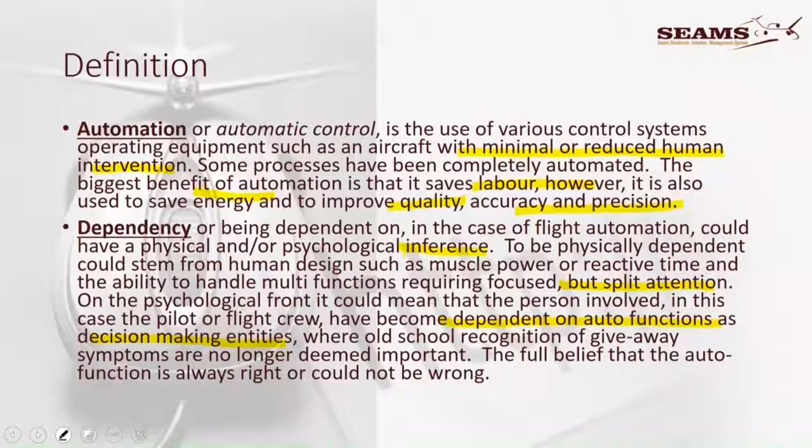That's a problem, because we get into our aircraft, we start flying, and it's an everyday occurrence where we use some form of automation. Whether that's your normal GPS doing some routing for you, or most aircraft now, when they fit them out with the latest Garmin 1000s, everybody makes sure they understand how to operate the electronics, and the electronics will actually take over all the functionality from the pilot. When it comes to single operators or smaller aircraft, it's basically the same thing. The capabilities once exclusive to the airline industry are now at the fingertips of your normal private pilot.

Just a little bit here to show the different kinds. Not a big deal. Advantages?

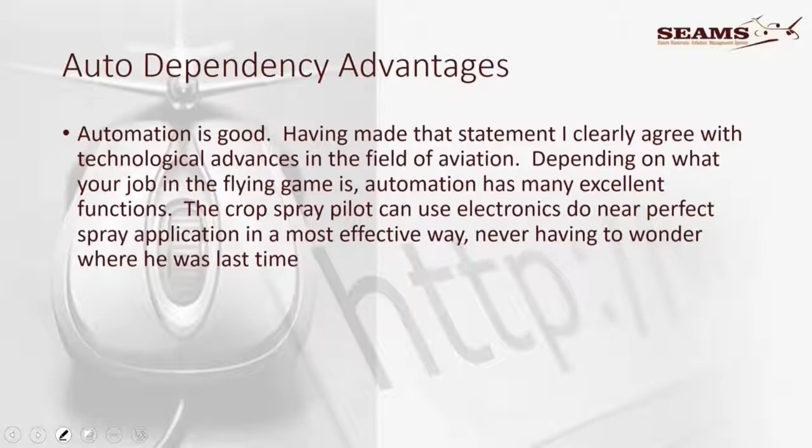There's a lot of advantages, and I agree. It would be a long list to say you can do this, and you can do this, and the rest. There are so many advantages it would be difficult to list them all. But it's great, sat in the cockpit the other day, and the aircraft can absolutely do everything. You just call up the flight plans, call up the approach plates, call up everything. The aircraft will put you on the ILS on final approach.

Or let's bring it down more to earth for the smaller aircraft guys, as used in the flight training schools. We've got autopilots as well, but besides the autopilot, we've all got GPS. Whether the GPS is on your phone, part of the aircraft equipment, or slapped on, whatever the case might be, it's a form of automation, and we are using the automation. And that is the trouble. Are we actually capable of using the automation correctly? Do we understand how to check up on the automation?

So fundamentally, it's great, and then we need, obviously, to operate from there. Just to say, the use of automated systems in itself is not a problem. That is not the problem. I absolutely believe that.

But if you are totally dependent on it... and I've seen how many accidents happen where guys start to fly in bad weather, instrument flight conditions, night flying and stuff like that, where once the autopilot disengages, the pilot is simply in trouble. We've picked up many an aircraft on the ground because the pilot wasn't capable of actually flying instruments himself.

Go and think about that. Now, you might say, but I fly for the airline. All right, it's fantastic, and I'm very glad that you've got an autopilot system when you're in the airline. I'm going to be even more glad if I know that if that auto system somehow fails you, that you're not going to fail me as a passenger.

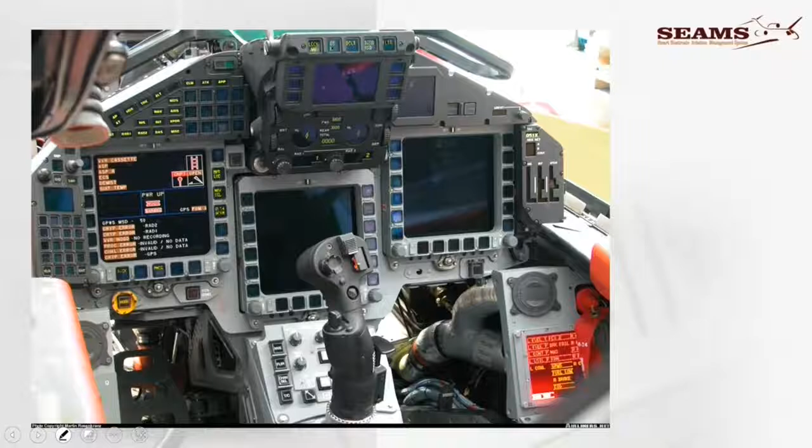Just another pretty picture of a pretty cool aircraft and what the environment looked like. Auto dependency pitfalls - the first one, habit forming.

Now, I'm not saying it's a bad habit, if it keeps within the rules of engagement. And the very first question is: do you know, have you been taught what the rules of engagement are when you use auto systems? If you don't know, we'll go into that later on.

How do you use autopilots? How do you use this? For now, just remember there is a protocol. There are checks that need to be done to come into the habit of the machine making the decisions, the machine making the decisions.

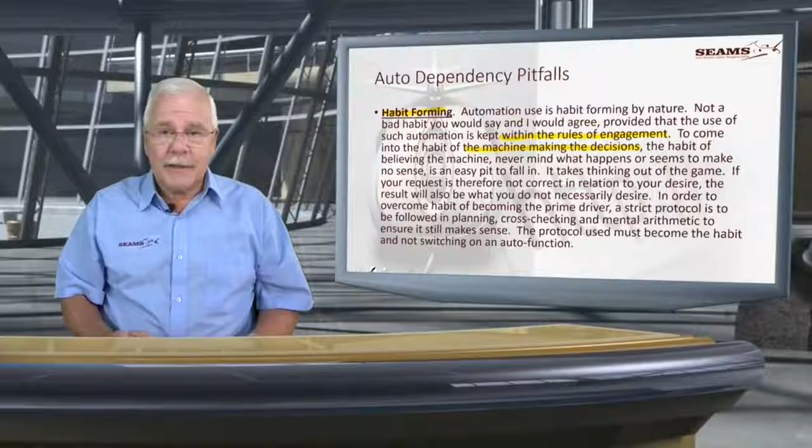Can you see the problem that I have here? The cognitive capability of the pilots, because it's just push and go, now becomes really a problem. The habit of believing the machine, never mind what happens, seems to make no sense. If it makes no sense, no, don't worry, the aircraft is right. It takes thinking out of the game.

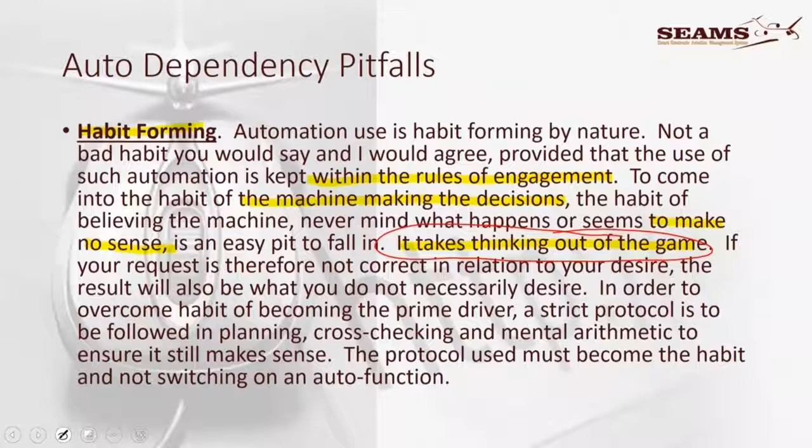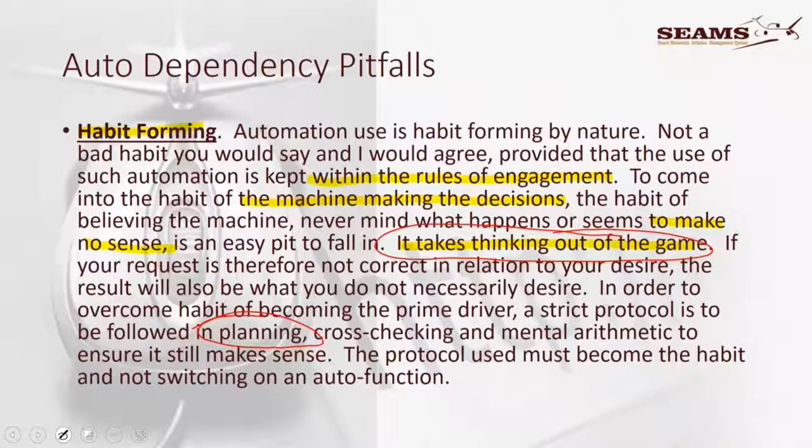Let me put this in red: it takes thinking out of the game. If your request is not correct in relation to your desire, the result will not necessarily be what you desire. In order to overcome the habit of becoming the prime driver, a strict protocol is to be followed in planning, cross-checking, mental arithmetic.

This is the thinking game, the game that we don't necessarily want to be in. It's so easy: go to button, go direct to, follow this approach.

We do the approach briefing. Are we really concentrating on the briefing? Have we got the capability? Are we able to take over from the autopilot at any time? It's just questions that I'm asking.

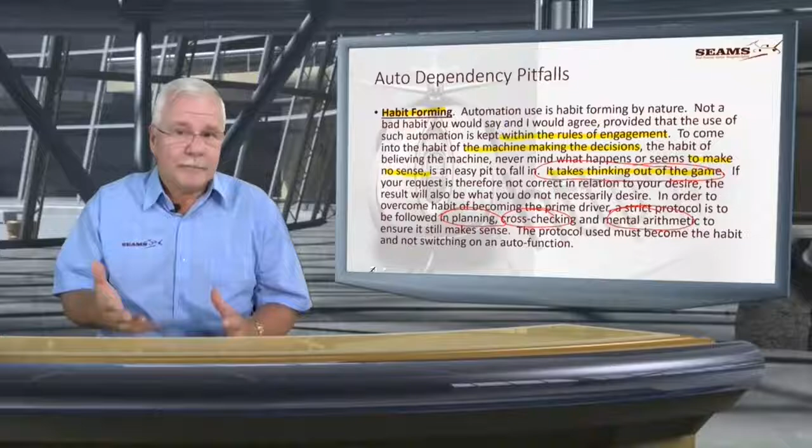Dependency forming. Now, what does that mean? When you become totally dependent on an auto function to do the job that we're earlier able to do, such as thinking, and here we're now going with the big ones: thinking, planning, decision making, basic flying, then you've lost the skill.

If dependency forming has taken away your motor skills and your cognitive capabilities, the basic skills, then we will read about the accidents in the newspapers. And unfortunately, it's the big boys falling out of the sky. We have learned to become computer operators and system manipulators, but we have lost the capability of actually flying and thinking like a pilot.

Again, not against the stuff, I'm absolutely for it. But I'm only for it if you can take over the function if the functionality is lost.

Raw data flying, can you still do it? No longer used to work out an approach. I don't have to work out let-downs. I don't have to look at sector safety altitudes and stuff like that. Oh, it's great, the computer is not going to make a mistake.

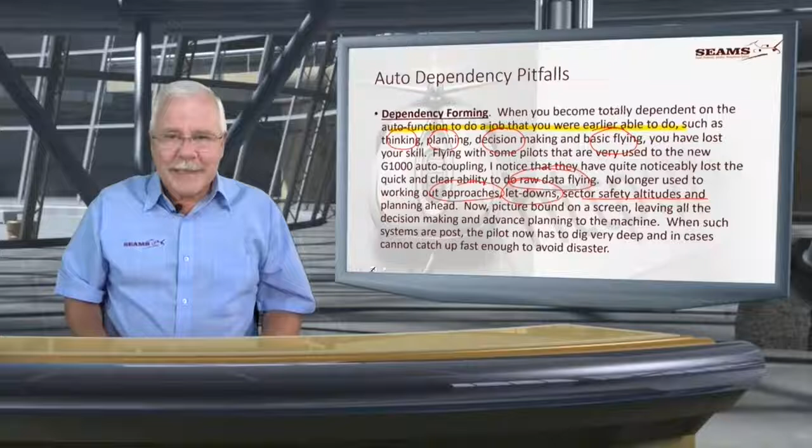That's the mistake — you're going to make the mistake. You're going to go to the wrong place. Maybe you should go to Golf Alpha Victor, but you've got in Golf Bravo Victor. It's quite a distance from each other. But if you don't pay attention, and don't have an idea where you're going, you're inside the trap.

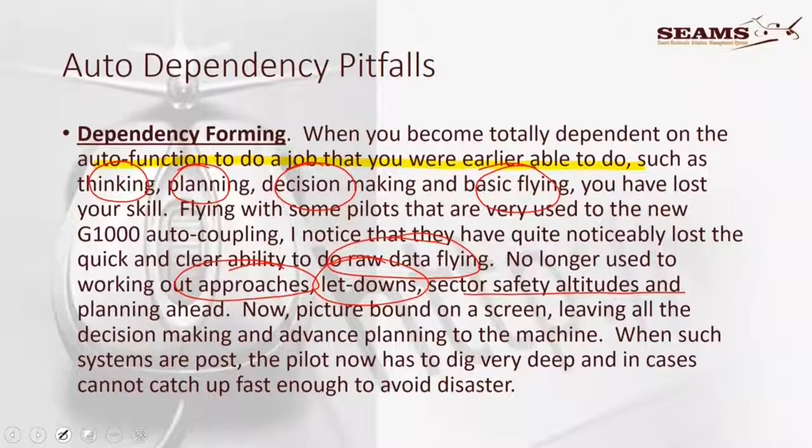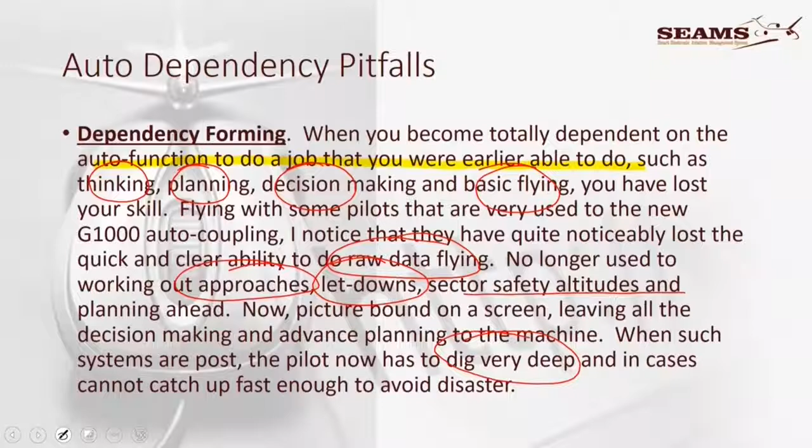And you are trapped. So it does not mean that we must stop thinking. When our systems fail, the pilot has now to dig very deep, and in cases cannot catch up fast enough to avoid disaster.

What about the skills? To have skills and to have the license to perform a certain skill has become, in certain circumstances, deemed as unnecessary. And we hear it all the time: 'Man, we're not going to have to train the co-pilots that long.'

We're going to do this. We're going to get them into the system. We're going to do that. And then, because we've got automated systems, we reckon that now we can save a lot of money by getting the drivers up in the front.

All right, and I'll put that one on and see how long it's going to last for you. That will be forever great, unless something goes wrong.

And you know what, I don't have to say that — you know that stuff has gone horribly wrong. And then the crew just simply didn't know how to even recognize that they were in trouble, let alone how to recover from a troubled state.

It's until the system fails or it has a glitch.

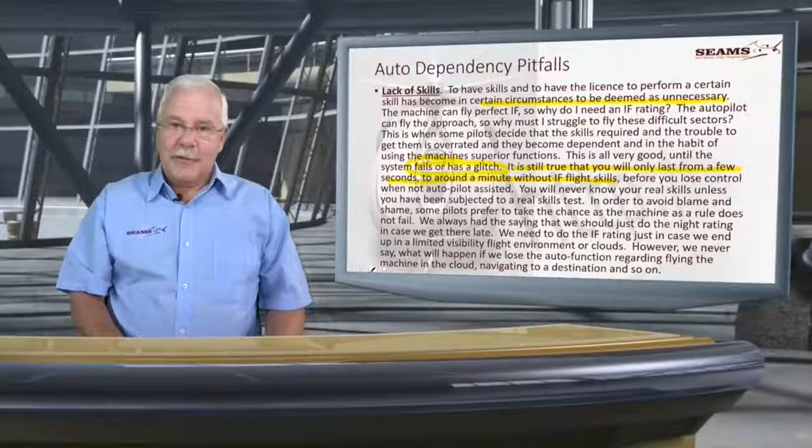It is still true that you will only last from a few seconds to around a minute without IF skills before you lose control when not autopilot assisted. Wow, I cannot stop. Everybody is playing their computer games and they have not been taught how to do a proper T-scan. The T-scan in today's world is as valid as it was yesterday.

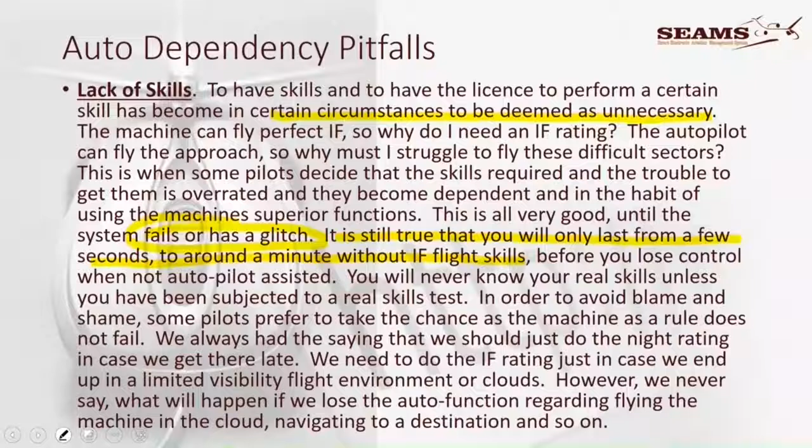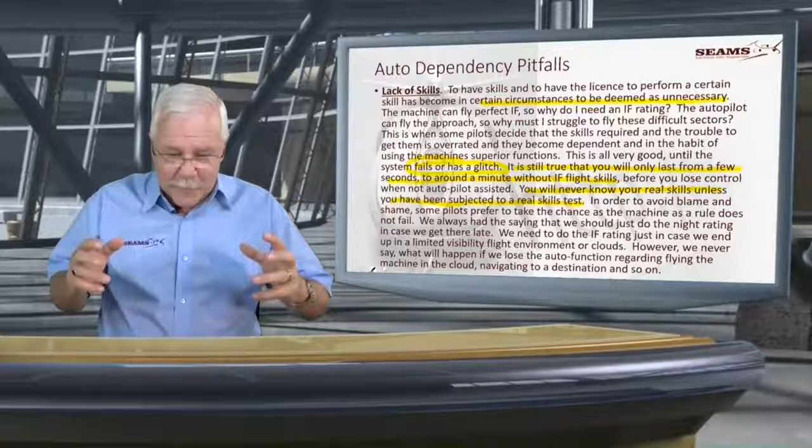Okay, now say you will never know your real skills unless you have been subjected to the real skills test. So what do we do in the simulator? We take away the auto functions from the pilot. There's two parts to the auto functionality test. The one is, if you use the autopilot, do you use the correct protocols? Do you have the correct calls? Do you do the correct cross-checks? And then the failures of the system starts. How do you pick it up and can you compensate? So this is what we do in a test.

Why? Well, if you cannot handle it in a simulator, where a crash is not a big indaba, although we feel pretty bad if we do crash, but in the real world, it's a total different story, obviously.

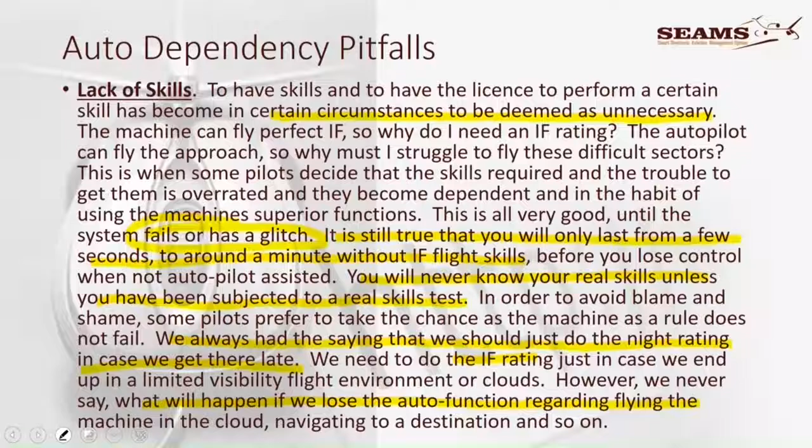We always had the saying that we should just do the night rating in case we get there late. Okay? We just do this. However, we never say what will happen if we lose auto functioning regarding flying, machines in the cloud, navigation, destinations, and so on. What am I saying here?

We do night flying just in case. I've heard the pilot say to me, I'm going to do an IF rating just in case. Are you going to do an autopilot failure or auto functionality failure or navigation failure? It's all auto functions. Have you got a plan? Is it something that you've been taught? Have you got the knowledge? Have you skills? Or have you got an attitude that, nah, too much trouble?

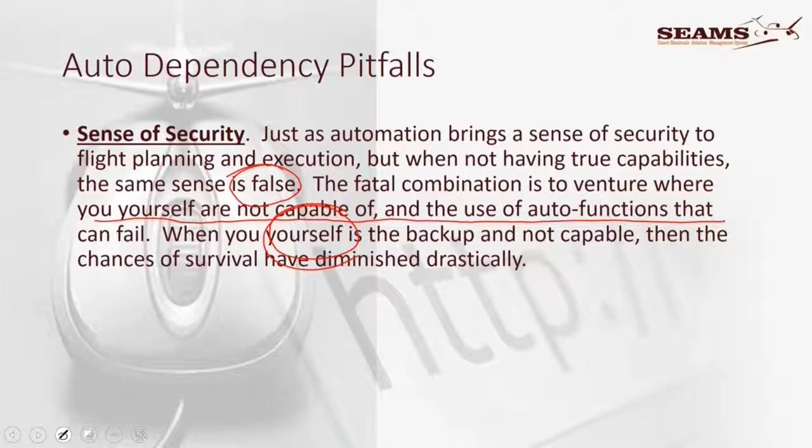Sense of security. Just as automation brings a sense of security to the flight planning and execution, but when not having true capabilities, the same sense is false. In other words, we're talking about a false sense of security. The fatal combination is to venture where you yourself are not capable of. Use of auto functions can fail when you yourself are the backup and not you are yourself the backup. Not so? You are your own backup.

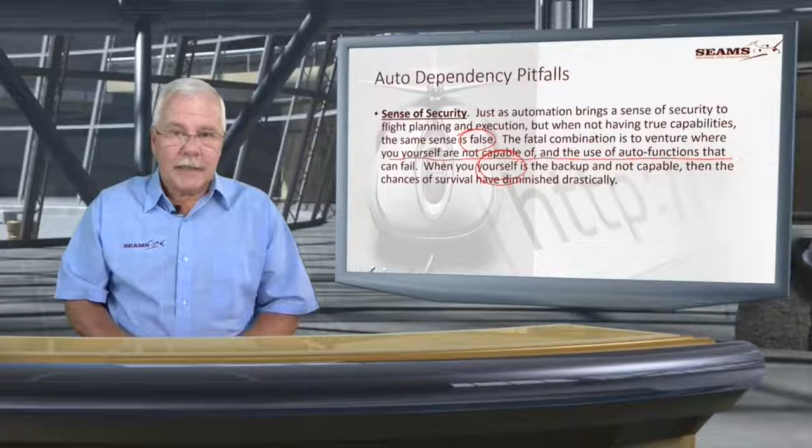It's terrible if you have to sit there and say, if I only. That normally comes way too late. How do we combat this?

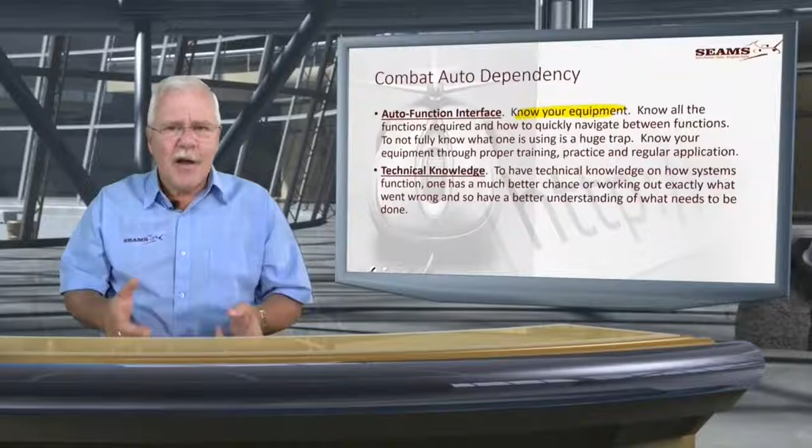Well, very shortly, what we have to see here is auto-function interface. Know your equipment. Know your equipment. Know your equipment. You must know all the functionalities. Really, we're flying around with autopilots, we're flying around with GPSs, so many auto functions and systems, but we don't actually really know. To not fully know what one is using is a huge trap. Know your equipment through proper training, practice, and regular application.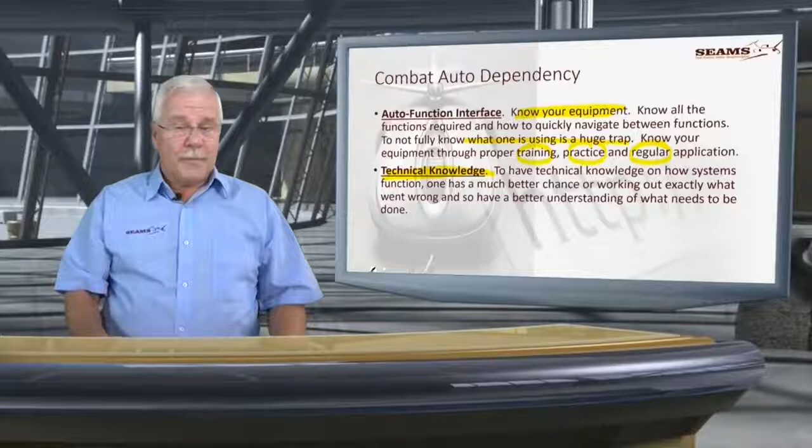Technical knowledge. We haven't got the knowledge. Do you know? If you don't know how the system works, how are you going to stop to ensure that the system is 100% functional? Little things.

That's a little bit of a, sorry for that. That's a little bit of a bad background that if you actually think of this in the background here, this is, the horizon is not what we wanted to see here in this case.

All right. How do we combat? Cognitive skills, your ability to think. Our ability to think when we are facing adverse conditions.

It's easy to sit in your armchair and think about what you would have done. When you're in a dynamic, ever-changing environment, with a lot of pressure and emotions starting to take place, if you haven't been properly trained and don't have proper knowledge, I'm afraid you're going to freeze up. And that's the last thing we can afford. Please, if you're my captain when I'm sitting in the back, don't freeze up. Be properly trained, understand the limitations of the automation as well as yourselves, and get over that.

Motorized skills - automation has taken away much of the functional stuff. If you're flying for a big airline, try and fly something small too. Do aerobatics, fly older birds - DC-3s, DC-4s, Yaks, Cessna 172s, anything where you can go and fly the raw data stuff.

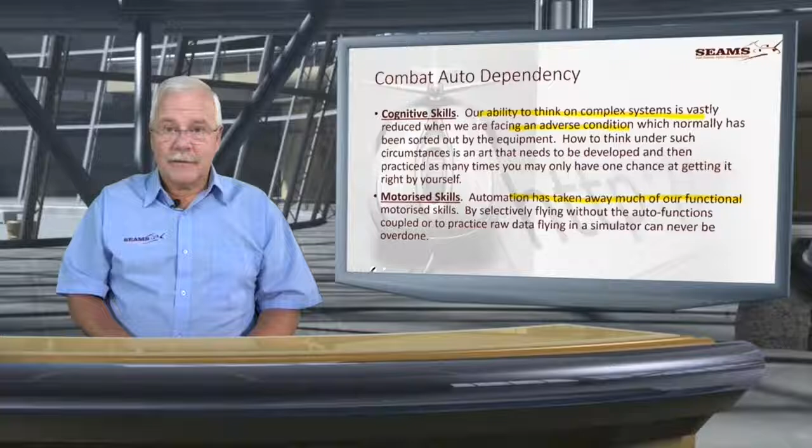I'm sitting on the side where sometimes I see guys coming from very high posts, captains and airlines, and now they want to get other civilian aircraft licenses. And I see how terribly lost people can be in a functional world where automation has deprived them of capability. Sure, not everybody, but it's probably a better idea to do something about it.

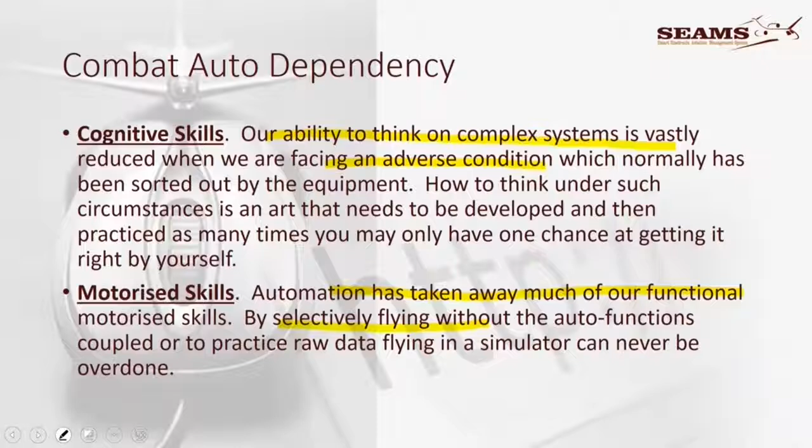By selective flying, without auto functions, that can obviously go a long way. Processes and procedural knowledge - well, that goes without saying. Remember, automated functions are all programmed according to specific logic.

If you know the logic, then you can anticipate. Otherwise, you're just a blind follower - a blind believer.

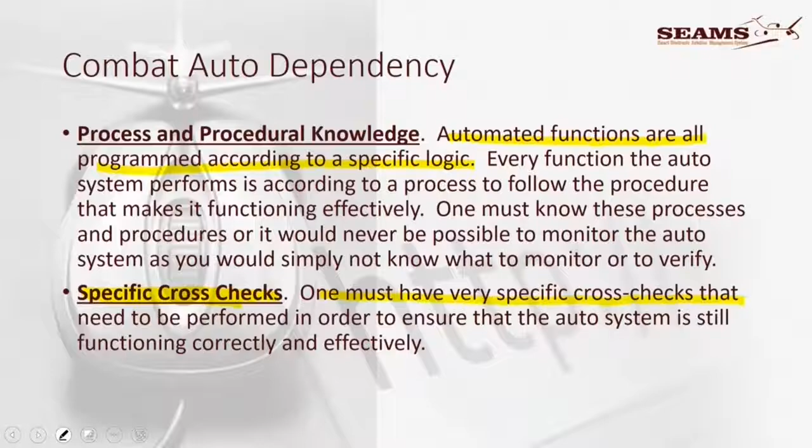Specific cross-checks - this is the part. There must be very, very specific cross-checks. And if you look at the environment of the bigger machines, the Part 121 airline guys, the charter guys, you'll hear that in the cockpit there's an absolute protocol on how to use automation - the cross-checks, the functioning, and the decision-making surrounding that. And then also the capability to notice that something is going wrong, coupled to the capability of then being able to do something. But we cannot have the capability of nil.

Please don't lose that - 'yeah, but I just press the go-to button.' Yes, and you go to the wrong place, then go to what? There's such simple fundamentals to know where you're going. Does it make sense?

I said I wanted to go to Waterkloof. Okay, I wouldn't want to go to Waterkloof, but you want to go to Waterkloof. But this heading is not right, the time, some things aren't right. How will you know something is not right if you do not have at least an idea what it should be? Then there's no comparison.

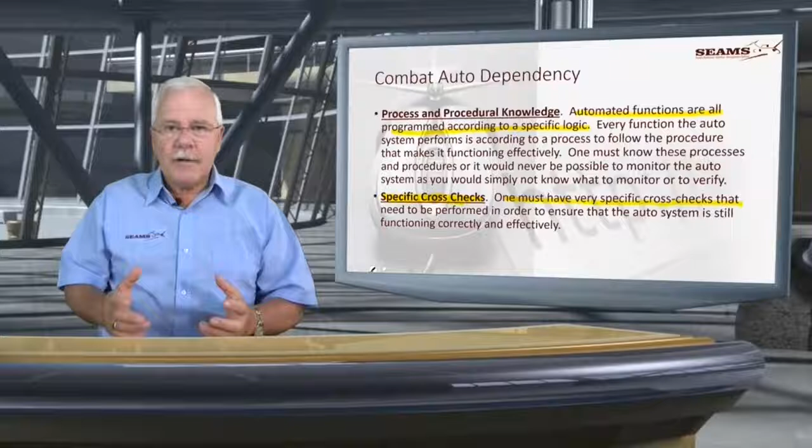And that's why we do planning. Planning is to give us certain expectations. So if you are spatially orientated, procedurally orientated, and orientated in the progressiveness of your flight plan, man, you're okay. Then you must just look at what you get versus what you expect. And from that, you can deduce and make very, very good decisions.

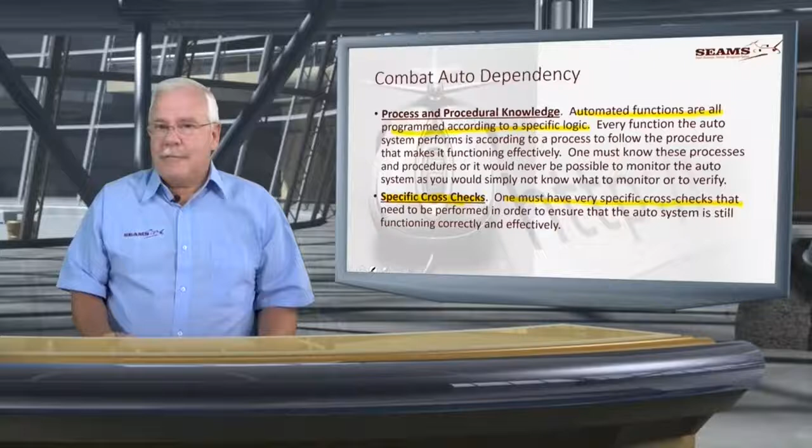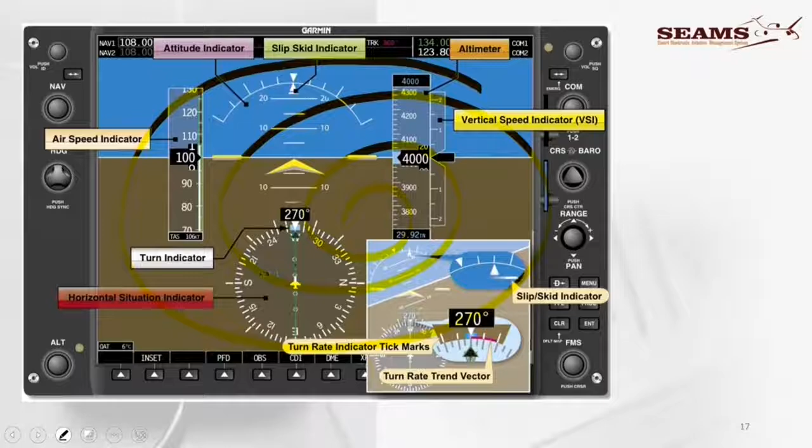That's a pretty picture. The only reason I put it up here is to say, the amount of instruments on here is mind-boggling. I must actually confess, I love this glass cockpit thing. I grew up with the steam-driven stuff, and I can use that nicely too. But man, there's nothing nicer than, well, to me, I love this kind of stuff.

But anyway, spatial orientation - to fly any route without knowing the basic routes, you're immediately at a disadvantage. Route studying has changed through the years. We used to do flight planning, draw lines, circles, markers, all that kind of stuff.

When you do electronic flight planning, it's the same deal - the computer will work it out, you don't have to punch in anything, it gives you the answer automatically. That's automated navigation backup. It gives you go-to, sorts out everything. Fly this approach - it sorts out everything.

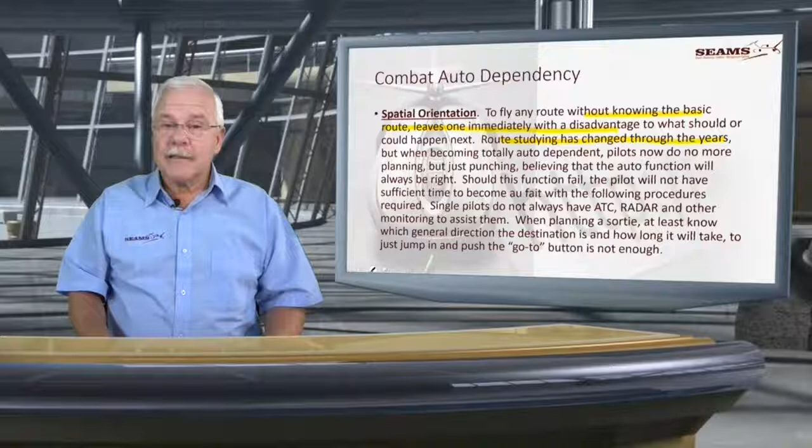Does that mean that we can now put zombies in front there? In other words, people void of the ability of thinking and reacting? Well, I don't know, maybe 50 years in the future. But I doubt if that will be in my time.

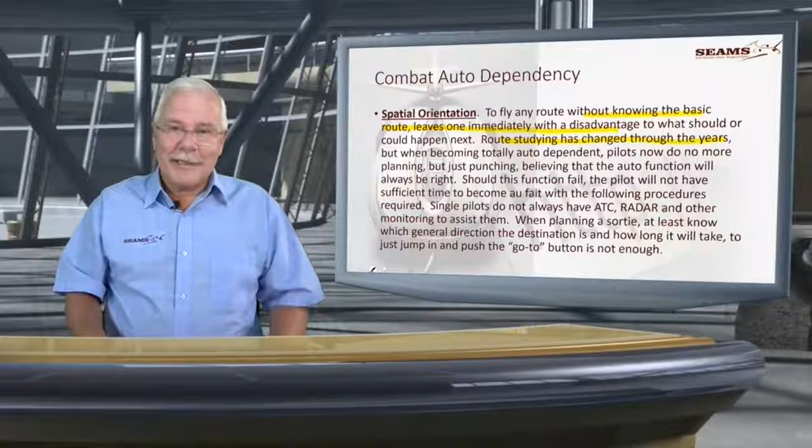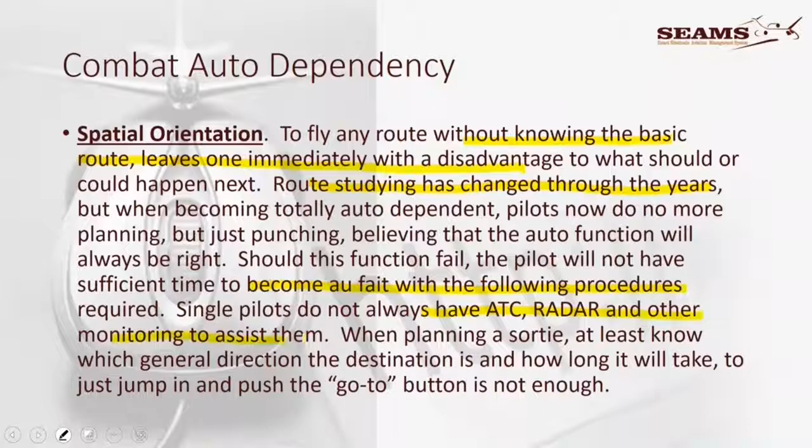You must be au fait with the procedures, you must know. Single pilots do not always have ATC radar and other monitoring assistance. No, it is not - you're flying out there in cowboy country. There's nobody to show you the way. And if you get lost along the way, that's when accidents can happen. And you know what? They do happen.

Is it necessary that the accidents happen? Wow, that's probably a debate for another day, but it is unnecessary accidents that happen under certain circumstances - that is unfortunately true. Remember that flying is a living game.

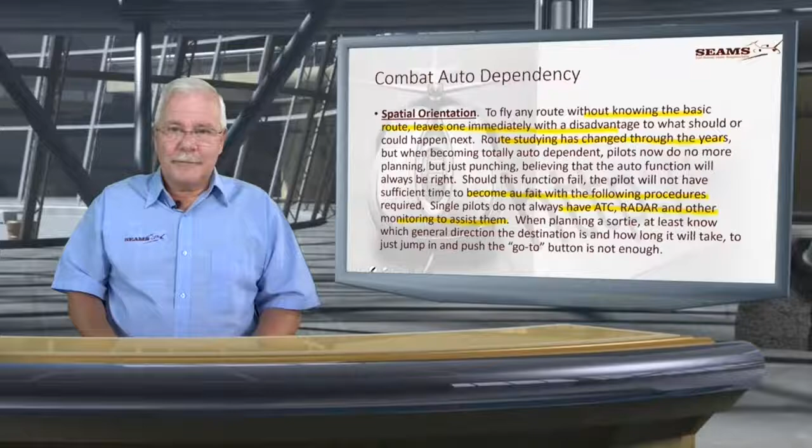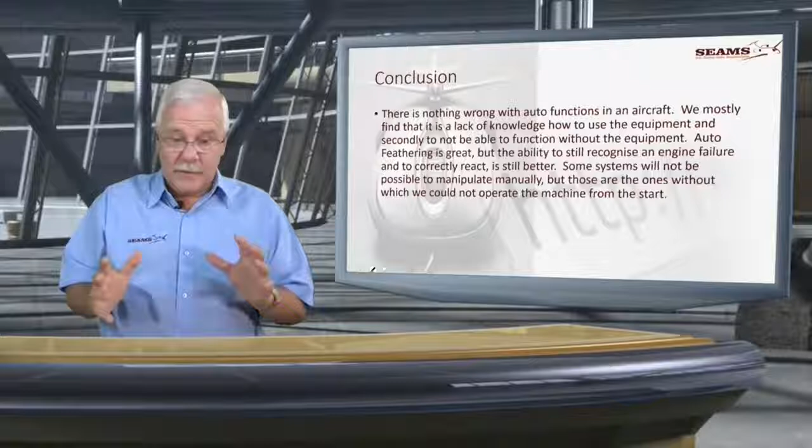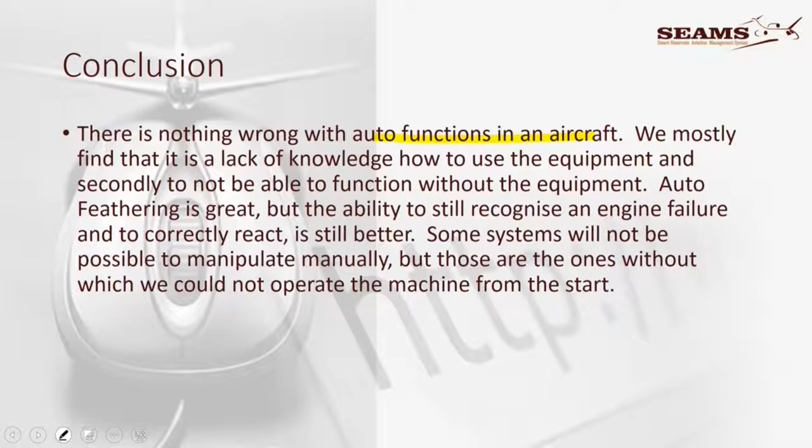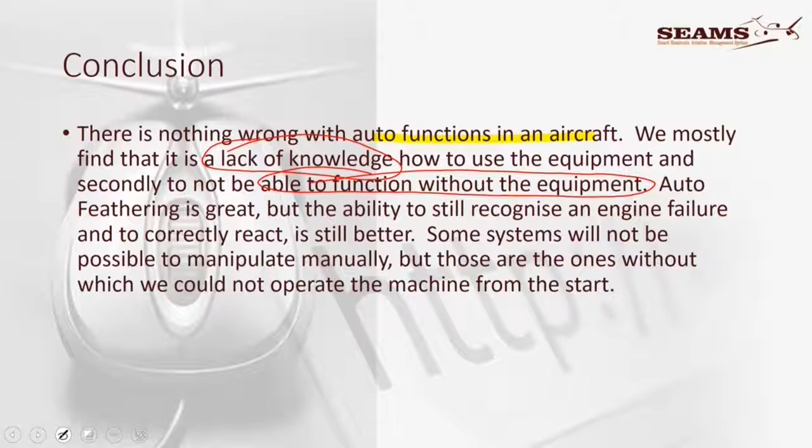So, conclusion: there's nothing wrong with auto functions in an aircraft. We mostly find it's a lack of knowledge - lack of knowledge how to use the equipment, and secondly, not being able to function without the equipment. Auto feathering is great, but the ability to still recognize an engine failure and correct react is still better. Some systems will not be possible to manipulate manually, of course, but those are the ones without which we wouldn't have been operating anyway. So what's the bottom line?

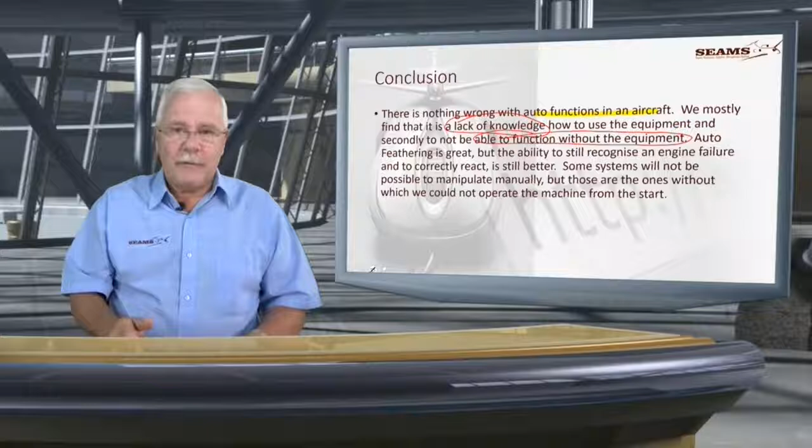You must know how the auto environment functions. You must have the skills to operate it. You must know the cockpit calls and the cross-references. You must always be vigilant lest the machine is dropping you, because you are the backup. So, what can I say?

Well, that was a little bit about automation, and as you can see, it's got serious pitfalls, and I really want to encourage you to be capable and to really understand the equipment in your aircraft.

Right, so next up, I've got something here from Thomas Honeyball, and he's going to just touch up with us on law issues. Okay Thomas, over to you. Okay, thank you very much, Uncle Charlie.

Well, the idea is to every month just give a short insert about aviation regulations, and we've dubbed it officially Aviation Law Lingo. Now, without any further ado, what I want to just touch on quickly tonight is Part 93. Now, I know you guys are all looking at each other saying, what the hell is Part 93?

Because that is something new that's come in, and that is to help cover some of the grey areas that we have in the regulation. So if we go there, I can just read that with you.

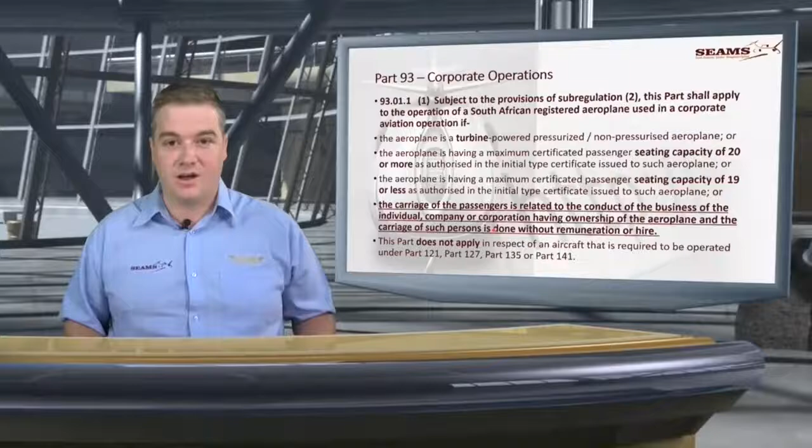Now let's just quickly look at what this part says. I'm just going to highlight a couple of things. First of all, who does it apply to? Let's just read at the top here, Part 93.01.1: it's subject to the provisions of the sub-regulations, and this part shall apply. So who does it apply to?

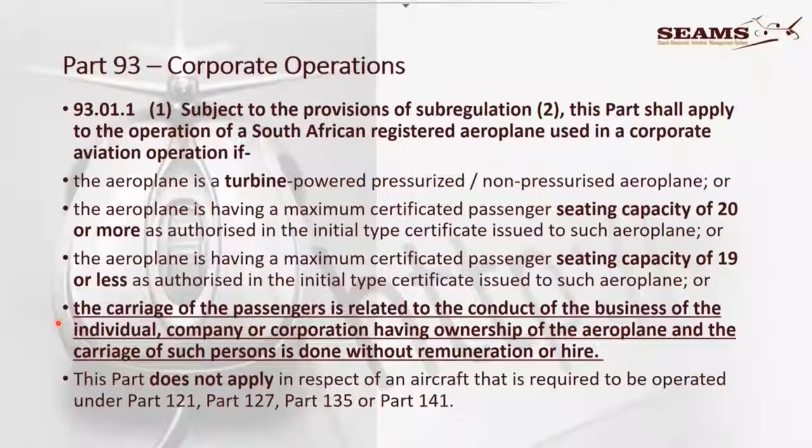Operations of South African registered aeroplanes used in corporate aviation if - and then there's a couple of things - whether it's turbine, pressurized or non-pressurized, if it has a seating capacity of more than 20 or less than 20. And then the carriage of passengers is related to the conduct of business of the individual, personal use, company, or corporation having ownership of the aeroplane, and the carriage of such persons is done without remuneration or hire. And then at the bottom here it just says who does it not apply to. So, very important, those things.

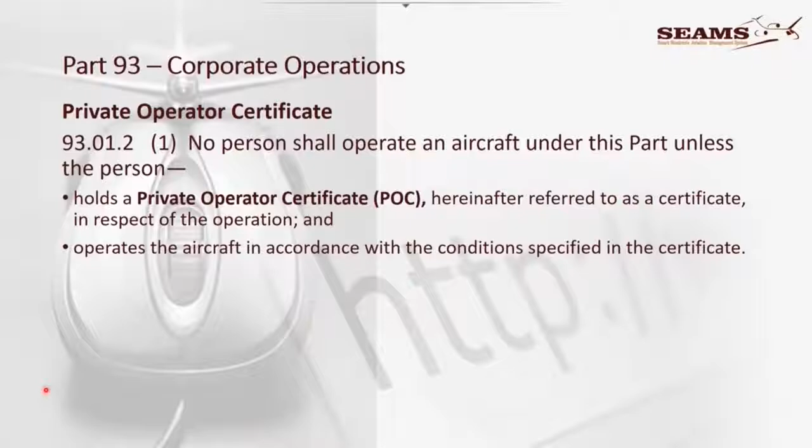And then what I just want to quickly highlight is what is going to be required under this part. It's not just a regulation - I have to physically get approval. So instead of an Air Operator Certificate, I'm going to get a Private Operator Certificate. My Private Operator Certificate is going to give me the permission, it's going to certify me to be able to conduct this type of operation.

So now there's a very clear line between what is Part 91 and what is business operation for myself and what is our charter. So just before we close here, I just want to quickly highlight a couple of things that is going to be required.

First of all, you are going to be required to have an operations manual. It's not going to be overly complex, just a couple of basic things, your SOPs, how are you going to operate, how are you going to do your crew scheduling and so on. But you're going to have an operations manual, and it must be approved. Like anything else in the law, this operations manual can only be more restrictive than the CAA regulations, never less restrictive. So you won't be able to put in your operations manual that you do anything contrary to Part 93.

So the next one here is you'll have to have a safety management system. And that doesn't just mean you have to have the safety management system manual. You'll have to have the manual, but there will have to be regular hazard identifications, and then you need to provide proof that you actually conduct proper risk management.

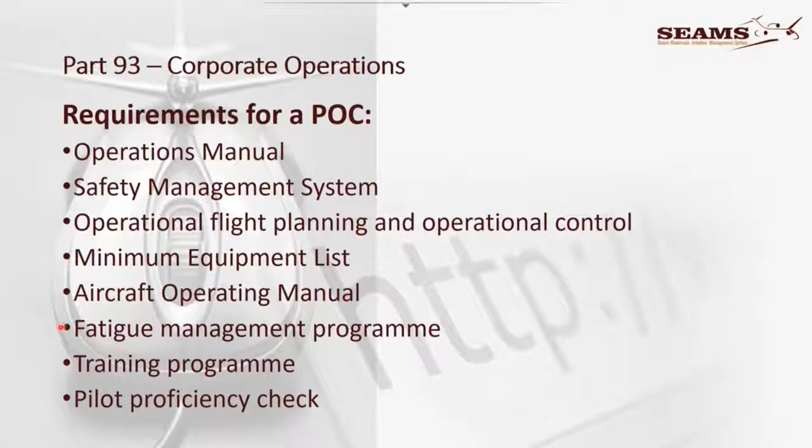And then the other one, the aircraft operating manual that you already have in your aircraft, that should already be approved. Fatigue management program - what they talk about there, I read it, it's just got to do with your crew and duty. Now Part 91 actually talks about crew and duty limitations and so on, so that is just going to be monitored carefully so that your pilots don't fly outside of their crew and duty.

And then a training program - there you're going to need to provide proof that everyone that is involved in your little company that's now flying all the corporates around has received training on the manual, and they know what the procedures are. If we're doing flight following, that they've received the flight following training, because although it's not a charter operation, but your exposure is exactly the same. So everyone needs to be trained, everyone needs to know what they are doing, at the different levels.

And then the last one here is your pilots will also need to receive a proficiency check, and then based on the type of operation that you have, that will be a 6-month or a 12-month proficiency check. It's a little bit less restrictive than the charter operators, but this part is specifically to give a little bit more control.

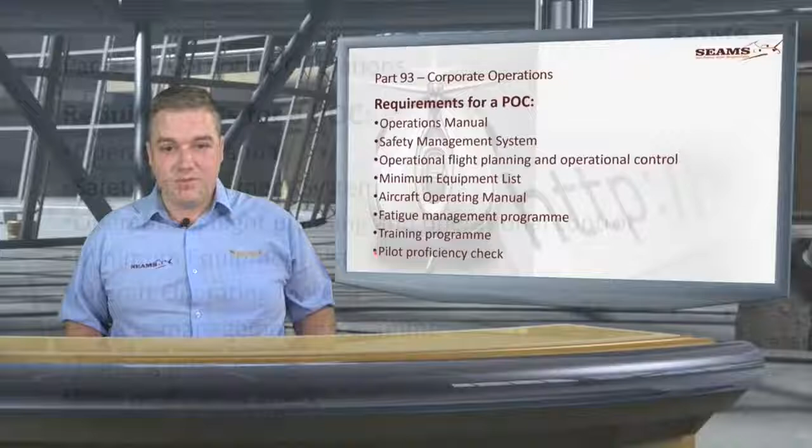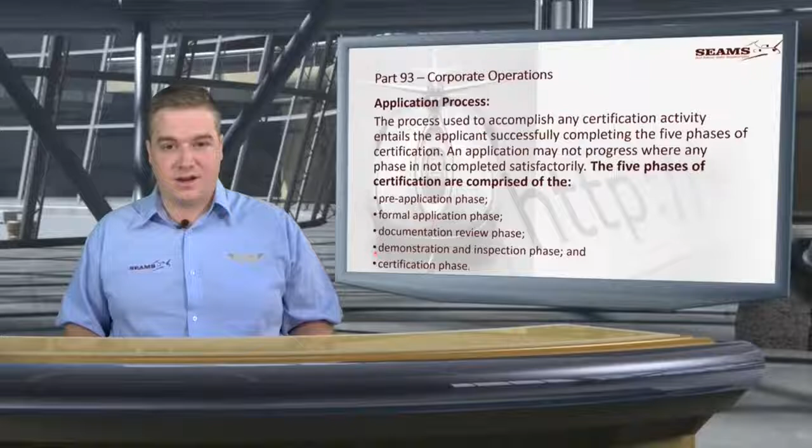And then, just in a couple of seconds to end off here, you might ask, how are we going to get this accredited? Well, the same as a charter operator, there's that 5-phase process. So you've got to go to CAA, have a pre-application meeting with them, hand in official application, hand in your manual. They've got to approve it. They've got to come to your premises. They've got to do an inspection. So this is no Mickey Mouse thing. Although we don't have to go through to the Air Services Licensing Council, CAA is going to operate full control over your operation.

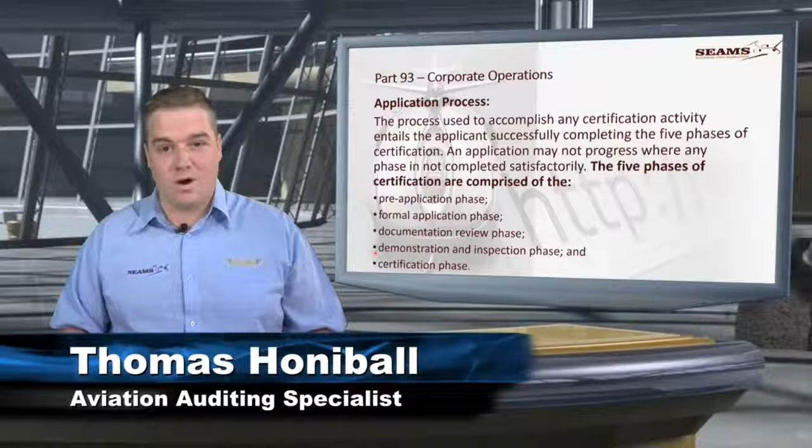Well, that's a wrap-up then, ladies and gentlemen. Now you know a little bit about the law. You've now seen how your aircraft can disappear in front of your eyes. You've seen how you can get lost and how we can save the day. Thank you to everybody, and until next time.